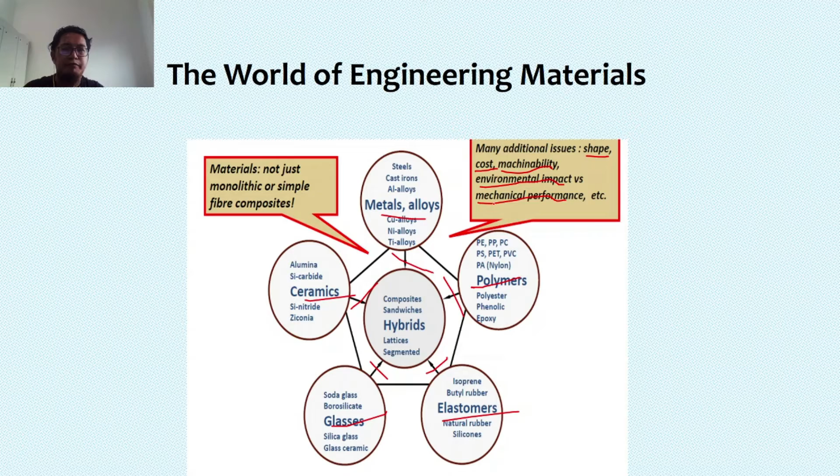So how do material and process selection relate with each other? A mechanical design comes with its functional needs, meaning that for the mechanical design of a car, its functional need is to take you from point A to point B safely.

And the process that is available to it is limited by the material capabilities. For example, a car that is being used in a country with 4 seasons is not the same as the cars being used in the tropics. And what material we choose affects the processing method and shape that are available or can be attained.

So function, process, and shape dictate the materials and process factors. And these factors we call attributes, which are, for example, physical, mechanical, economic, thermal, electrical, and environmental.

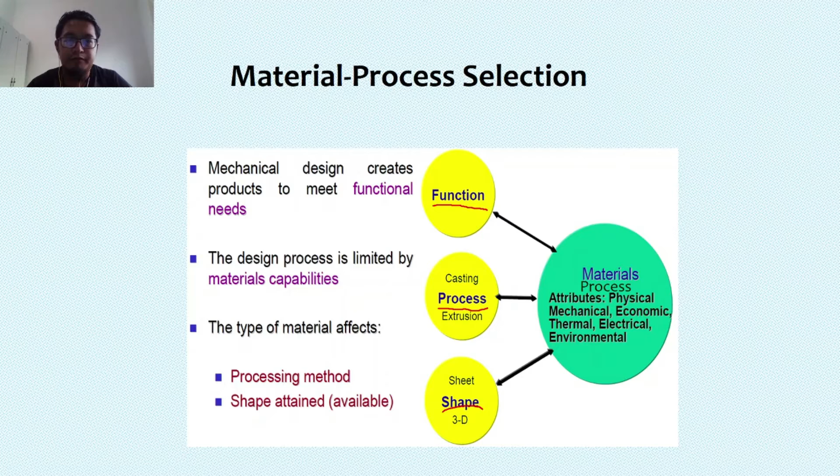So selecting the right relationship for materials and process to function is part of the engineering design. And designing engineering components is usually limited by the materials and process availability. So with new materials and new processes coming out, we can have newer designs of products. For example, with new advancements in battery technology, we now have the electric sports car manufactured by Tesla.

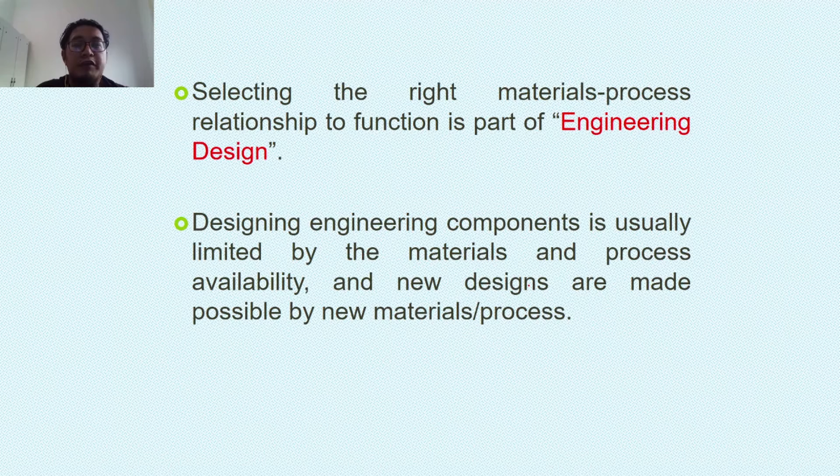So these are the factors that influence selection of material or process. Some of the issues could include properties, physical or mechanical. Maybe you want a product to have a higher strength or higher tensile strength, or maybe on cost analysis, the material's availability, or its material life and maintenance, meaning that if a new material has a longer lifetime, you want to change to that material.

Manufacturing considerations: castability or formability, meaning that a newer material can easily be formed or cast into the desired shape. And machinability or coatability, you want to have a new coating for corrosion protection, or heat treatment, meaning that the material needs to be heat treated to change or modify its properties. Weldability means the ability of the material to be joined with another material.

Failure and repairability means that if the previous material often fails at a certain condition, you have a newer material that is able to withstand that condition. Repairability, and also environmental issues, ergonomics and safety, meaning that the new material is safer or more environmentally safe to be used. It has more chemical resistance, and for recycling, of course, materials that are able to be recycled in usage, meaning it can be used again and again without detriment to its properties.

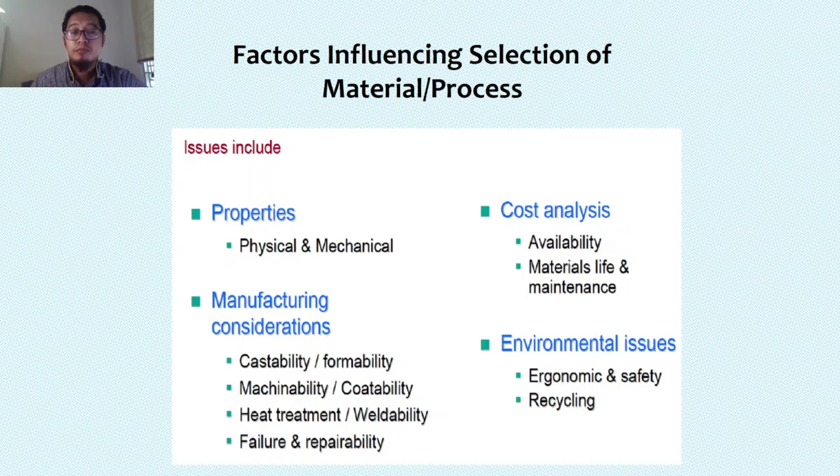So I have talked about materials that you've been exposed to during your engineering materials subject. So now we're talking about the categories of process that any kind of product normally undergoes. There are 4 categories of process. The first one is called primary shaping, meaning that we take the primary materials, the raw materials that are available, and we shape them into the first shape prior to making the final shape that you want of the product. It's called primary shaping.

Here is an example. It's a kind of injection molding. The injection molding takes the raw material in the form of granular polymer and injects it into any shape that you want, be it a seat or a bottle through blow molding, for example. So those are examples of primary shaping, and even casting is also categorized as primary shaping.

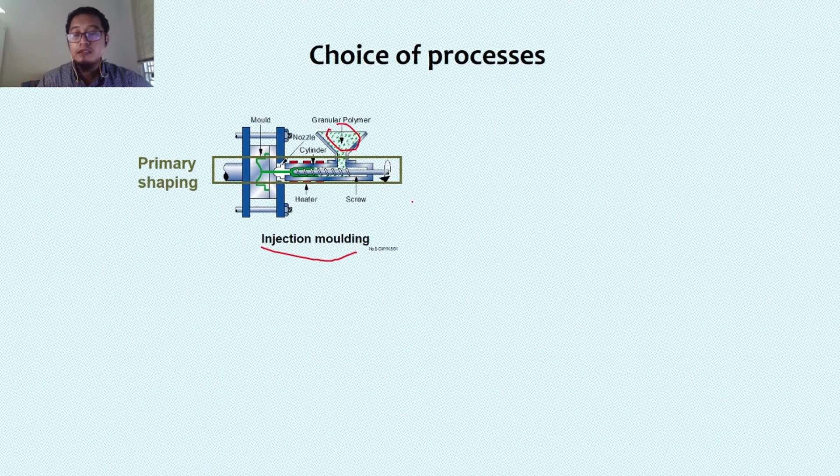Then we move on to secondary shaping, with, for example, here, machining. So from the primary shape, we machine it into the final shape of our product. So casting is a primary shaping. Then after casting, for example, we shape it, we machine it, mill it into the final shape that we want, to the exact dimension of the design that we have.

So the next process is joining. A product could have different parts to assemble, and joining is a method of joining those different parts to assemble the final product. One method is welding, which is a physical joining method where we heat up using an intermediate material, and we use that to join different parts to make the final assembly.

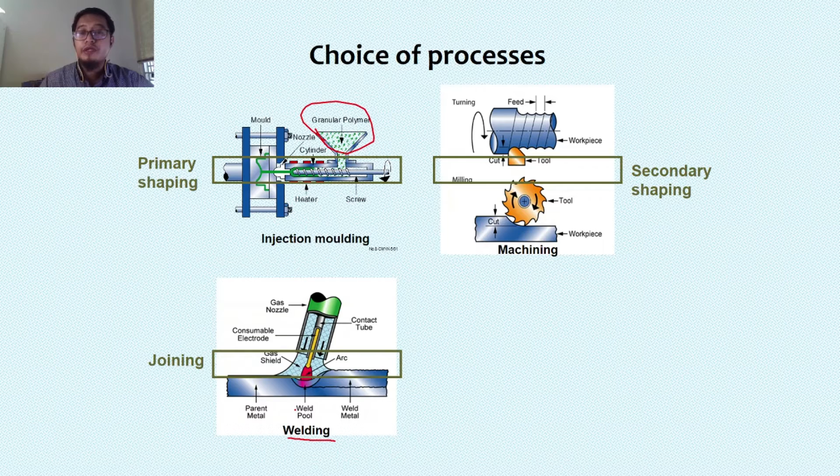If we don't use physical joining, we can use chemical bonding instead, which is for example like an adhesive, if the material cannot stand the heat. So we can use chemical bonding to join the different assembled parts.

The final category is surface treating, for example when we want to modify the product to have a certain attribute. For example, we want the product to be more corrosion resistant, so we use anti-corrosive material to coat the product, or we want it to resist heat better, so we put in heat resistant material to coat the final product.

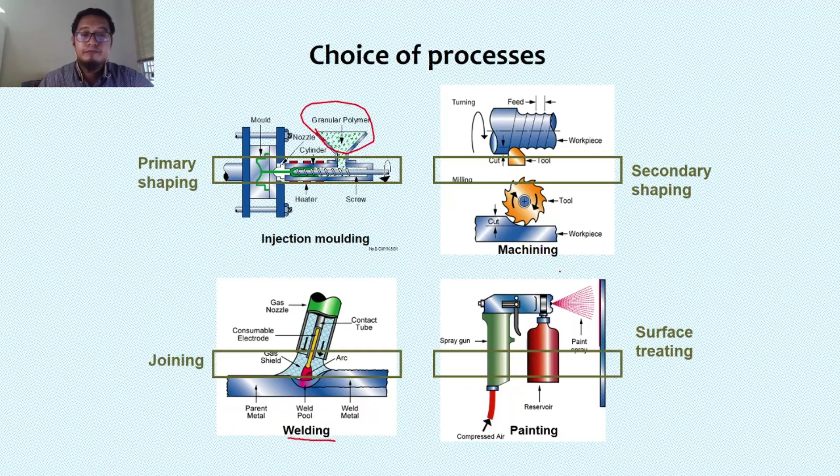So I've talked about materials and process. Now moving on to the categories of shape of a product. There are three categories: the first is prismatic, second is sheet, and finally is 3D.

Prismatic means that when we cut the shape in half, the shape is symmetrical. Both sides of the parts being cut have the same dimension, so if we combine them again, we get the same shape again. For prismatic we can have a circular product, a circle, or even a sphere. For non-circular prismatic shapes, we can have an I-beam, a square, a rectangle, or a triangle.

The processes that generate this kind of shape are wire drawing, extrusion, rolling, and shape rolling.

For sheet shape, we can have flat or dished. Flat shape simply has a certain thickness, and it can be bent, and the shape can be assembled or joined together with another shape. For dish shape, it has curvature or a cylindrical shape with different features than that cylinder. Processes that produce this kind of shape are stamping, folding, spinning, and deep drawing.

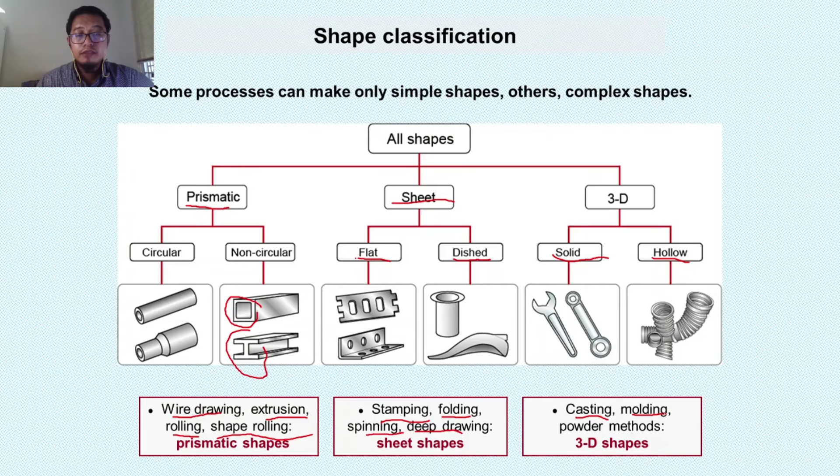Now I'll share some examples of material and process problems that arise when we choose poorly, or we don't understand the process entirely. So what are the examples that can arise?

For example, like an airplane—from my previous experience working in an aircraft manufacturing component company. The wing is the one that helps to generate lift. Even though the jet engine provides thrust, to lift the aircraft you need wings to generate enough lift for the whole aircraft. So it should have enough stiffness, strength, and toughness, and it also should be light. If we don't have those attributes properly, we can have so much problem.

If it's not stiff enough, the aircraft wing could be easily bent during lifting. And if it's not strong enough, the aircraft can break when the force of the lift exceeds its limit. If it's not tough enough, it will not only break, but also break in sudden failure, without any deformation or warning.

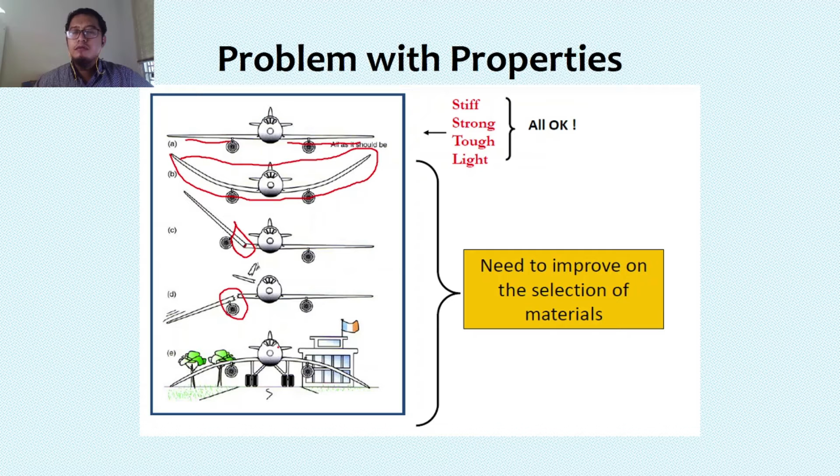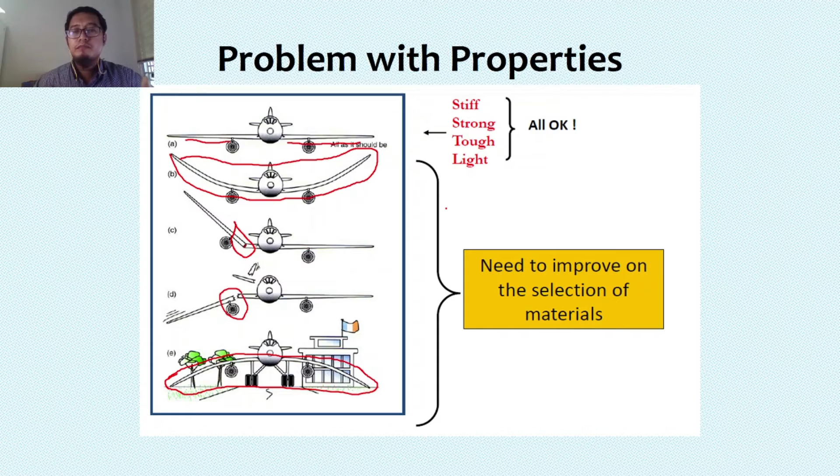And if it's heavy, then it cannot even generate lift, because the weight of that wing itself can affect the airplane's ability to even take off. So it has to have a balance of properties—stiffness, strength, toughness, and density, meaning its weight, light or heavy—so that the aircraft can even fly.

So even if, let's say, we use a bearing and we don't use a proper lubricant, then we can have failures where the bearing can easily fail, as you see here.

Over time, as a bearing is used, the surface of the bearing is in contact with another surface. So if we don't use a proper lubricant to match between these two mating components, we can easily have a failure in the product.

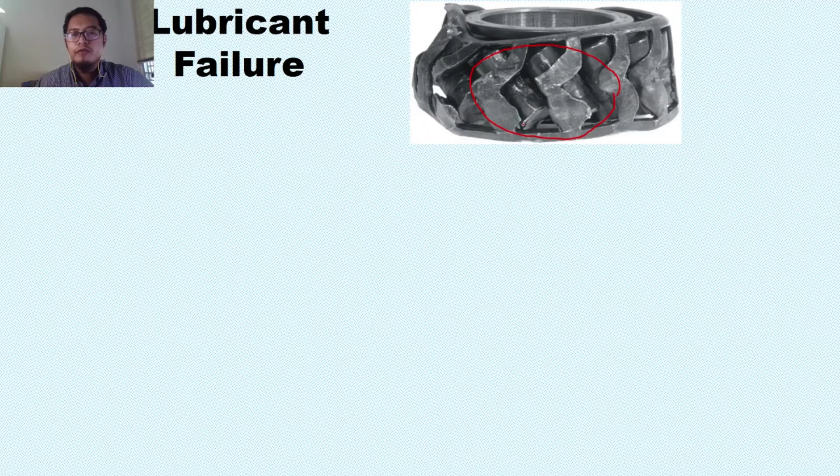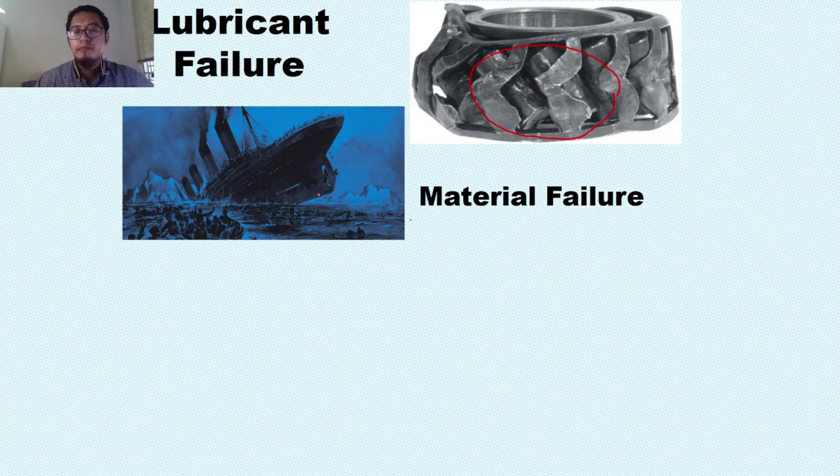The most famous example of this kind of failure is the Titanic. Although there are a lot of factors that contributed to this catastrophe, one of the major contributing factors to the disaster is material failure, meaning they didn't understand how metal alloys behave in a colder environment, losing their ductility and becoming more brittle.

If you want to do joining, and you don't set the correct parameters or use the correct electrode or materials to join, you can have defects that we can easily see.

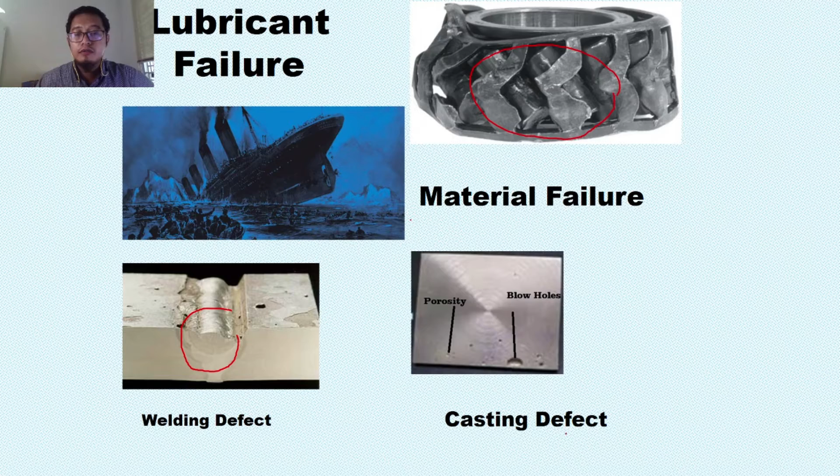And also for casting, if you don't have the correct recipe for the cast, then you can easily have defects like porosity and blowholes.

Now I will share with you the evolution of both material and process through to modern day. In the beginning, in prehistoric age, we have materials that our earliest ancestors were exposed to and used. For metals, we only had gold, and for ceramics they used antlers from deer, bone and shell from animals, leather from animals to cover themselves, and stone for utensils.

About 40 to 50,000 years later, the use of metals increased, so we learned to use bronze, silver, and copper. That's during the age when we underwent the Bronze Age and the Iron Age.

For ceramics and glass materials, we now have concrete - we know that in the pyramids they used concrete to build those big structures. And for natural materials, we now have even lighter materials, for example cork, used to store drinks in bottles and everything.

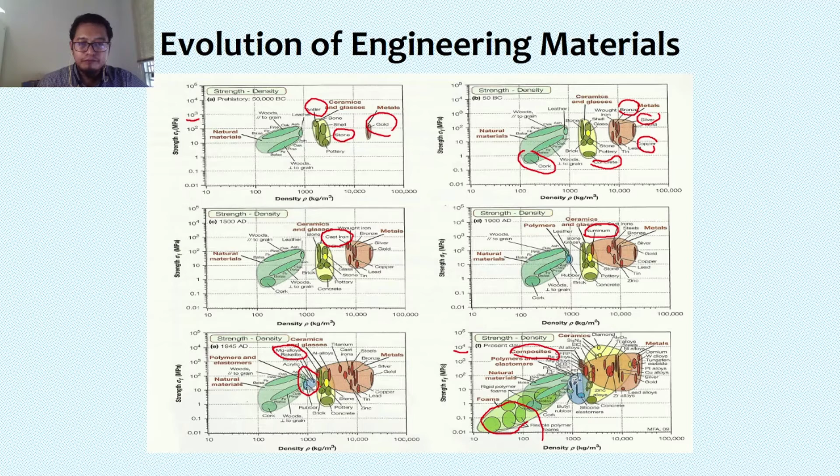Next, from materials, now we move on to process. Beginning in the late 18th century, this was the first industrial revolution that our ancestors went through, with the introduction of steam power, locomotives, and everything. At that time, we had small industries running with about less than 10 workers.

At the beginning of the 20th century, we started the second industrial revolution with the assembly line, and workers now numbered more in the hundreds. With electricity now more abundantly used instead of just steam, the third industrial revolution brought robots. Even though the workforce didn't increase, efficiency increased, and electronic components began being produced.

Finally, from 2010 onwards, industry is going through the fourth industrial revolution, which some of you may have heard of. Now workers may not even be there, but factories run by themselves using automation and smart systems like cloud systems, meaning they can be accessed anywhere in the world, with access to production data in real time. This is what industry is moving towards.

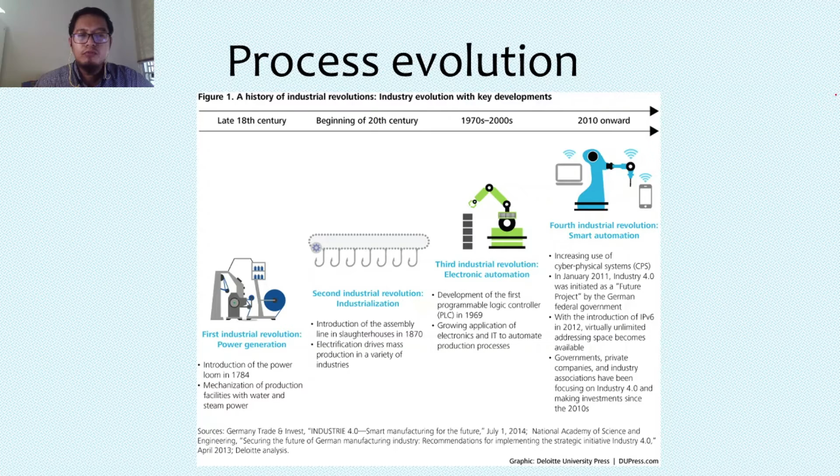Next, I'll talk about product evolution - what happened as both materials and process evolved, and what effect this had on the product. For example, this is something we normally see in houses: the vacuum cleaner.

The first vacuum cleaner was manufactured in 1905. It was human powered and bulky - you had to pump the vacuum cleaner itself to create suction power. It was made entirely from natural materials available at the time: wood, canvas, leather, and rubber, reflecting the materials used in that era.

Fifty years later, because of the evolution of process, newer materials like plastics emerged along with newer machine-involved processes, leading to a more cylindrical cleaner rather than a bulky square or rectangle shape. It became electrically powered - you could plug it in since electricity was now abundantly available. It was made entirely of metal, which could withstand the higher vacuum power from the motor. It was small but still heavy because of the metal.

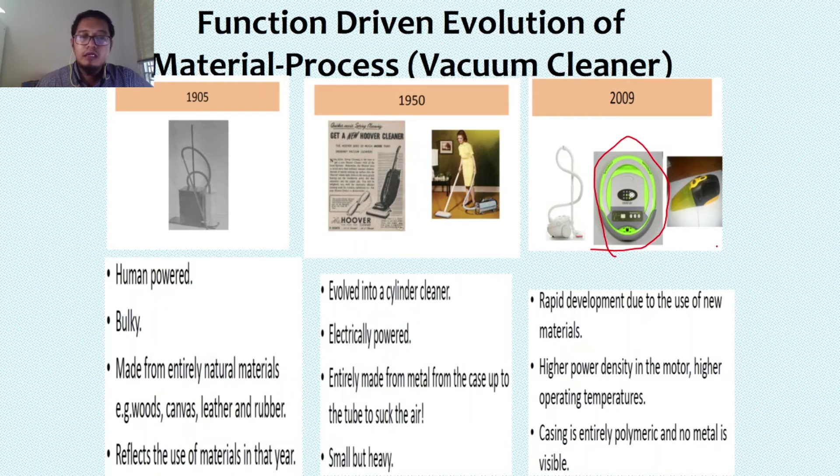The newest, latest versions use plastics and automated processes, giving us robot vacuum cleaners. They're lighter, made of plastic, and the motor is more efficient. They can operate at higher temperatures, are more mobile and portable - you can bring them anywhere you want. So you can see the evolution starting from about 100 years prior to how things look in the present.

Now I'll show an example of how material and process relate to products. For example, in mechanical engineering, take the semi truck that carries loads. The carrier that holds the load is metal, which needs higher strength to withstand the heavy loads of materials being brought to the site. The gears are made of polymers because polymers can withstand repeated cycles of usage.

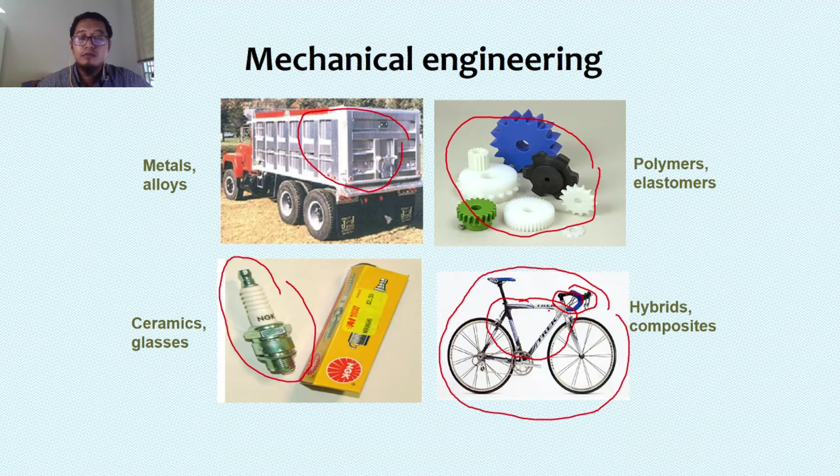The spark plug, used to generate combustion, is made of ceramic. For sports and recreational use, like bicycles, the frame is made of composite materials - a magnesium-based metal matrix composite - and even the handle is composite, making it lighter with better performance during cycling.

In aerospace and motorsport, we have the turbine engine, made of metal - single crystal metal - produced through a controlled environment. Then we have the dynamo used in that engine as well.

For dynamo, which produces energy, the cover is made from polymers and elastomers. The bearings are made from ceramic glasses - it looks like metal, but it's ceramics. For extreme conditions like a jet fighter, it's made of composites, so it has higher strength but still enough stiffness and toughness to withstand very high temperatures and extreme conditions.

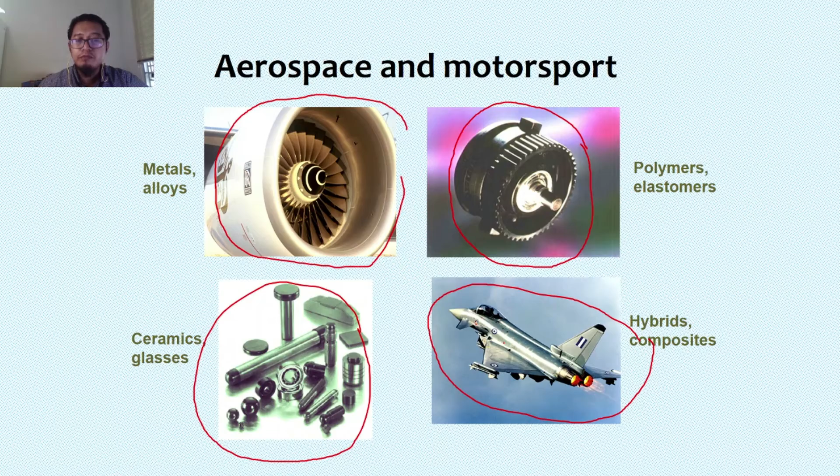In civil engineering, we can see metal frames of a window, even the cover of this famous building. And for polymers and elastomers, this is a famous building in Leicester in the UK.

This entire cover here is made of polymer. For ceramic glasses, of course, we use it as windows. And hybrid composites for decorative shapes - it actually looks like a brick, but it's hybrids and composite material.

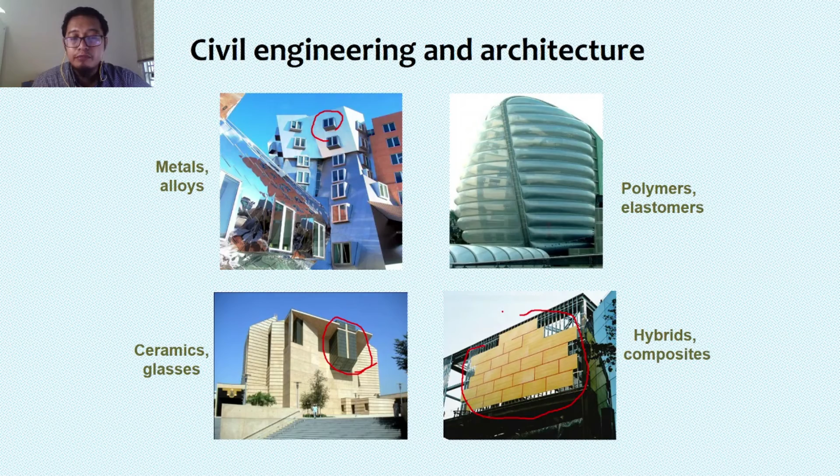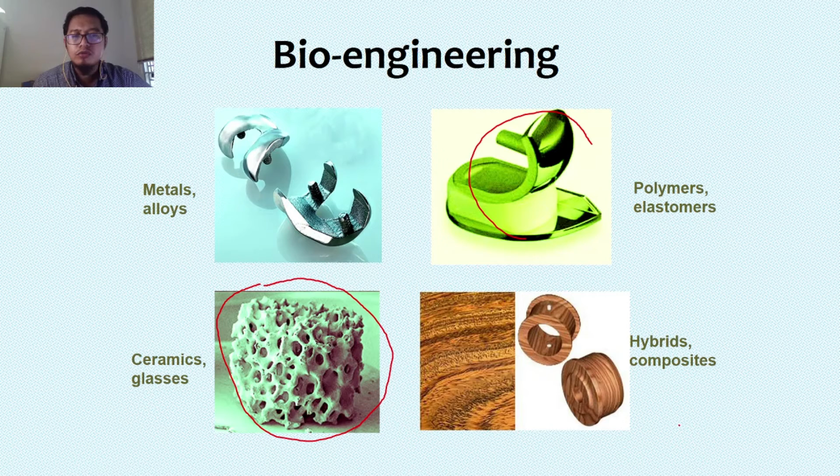In bioengineering, metal alloys are used, for example, to replace a kneecap, and polymers and elastomers are also used as materials. Ceramic glasses too, for replacing bone, for example using hydroxyapatite. For wood-shaped products, we use hybrids and composites, like a mixture of sawdust and different materials to make the product.

And for product and industrial design, metals for boiling water to make coffee, polymers and elastomerics to make toys like Lego, ceramic glasses to make water bottles for drinking, and hybrids and composites for producing different industrial designs like concept cars and concept vehicles.

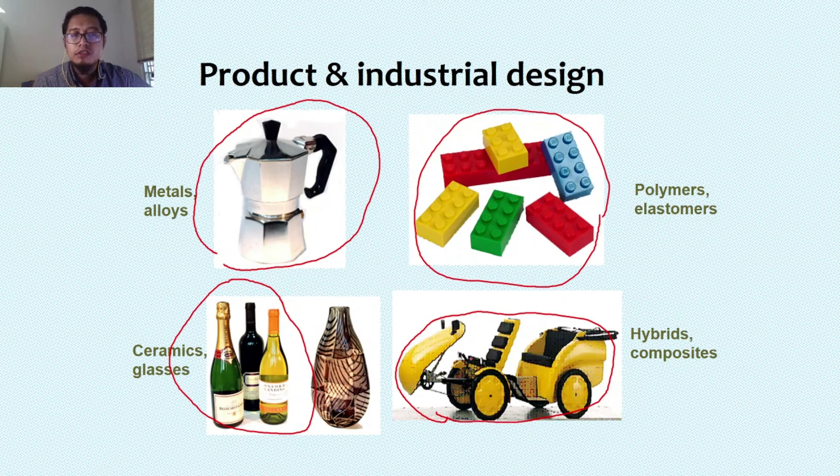The software we'll be using for this subject and course is CES EduPack 2013, by Granta Design. It consists of the CES software, which we'll share with you so you can install it on your own personal computer.

You can also access 23 PowerPoint lectures - you can have a look at some of the slides that I use and refer to. Next are white papers or case studies of how they use CES software in trying to solve engineering or materials solutions.

All these teaching resources you can access at teaching.grantadesign.com. You have to understand that the CES EduPack version is from 2013, about 7 years ago, and because of the expired license, we only have access to open source resources on the website. There are resources only accessible with the latest license, but the rest are still open source - you can access them anytime for tutorials or exercises.